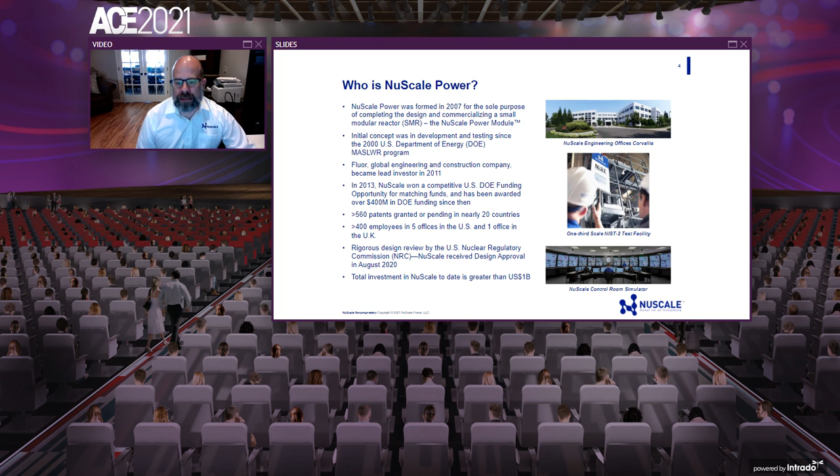Total investment to date is over $1 billion. You can see we already have a functioning control room simulator, and it's far different from any other nuke plant that I've worked at, in that it's much more advanced and intuitive than the old 60s design plants.

So why is it smarter? This is what I used to work on and operate, a typical pressurized water reactor. There are two kinds of reactors in the country: boiling water reactors and pressurized water reactors in commercial operation today, about 100 of them. This one, the pressurized water reactor type, is the one that's like San Onofre.

Inside these large dome containments that have thick concrete walls, you have a reactor pressure vessel, pressurizer, steam generators, and reactor coolant pumps, and none of these components are small—they are very large. But with our design, we remove the need for external pressurizers and steam generators because they're internal to the design. And since we use natural circulation, we remove the need for reactor coolant pumps.

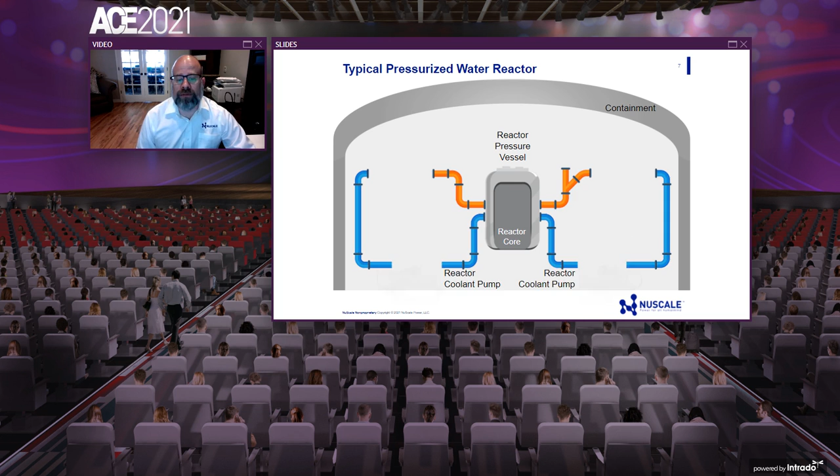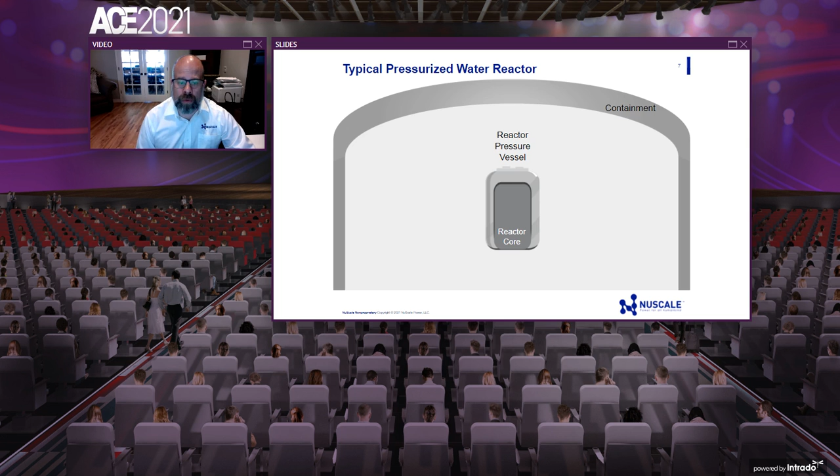What you end up with is a very compact containment and reactor pressure vessel that is about the size of a traditional core, reducing the size immensely. The containment vessel encloses the reactor pressure vessel—it's all one integral unit, including the steam generator and pressurizer and containment in an integral package.

It produces about 77 megawatts of electricity per module, but they're small enough to be built in a factory and transported. You can dedicate each one to whatever independent operation you want—whether one of 12 modules produces heating steam, one produces hydrogen, or all produce electricity. You can get up to 12 modules with 924 megawatts of electricity, and down to 4 and 6 module plants, depending on your needs.

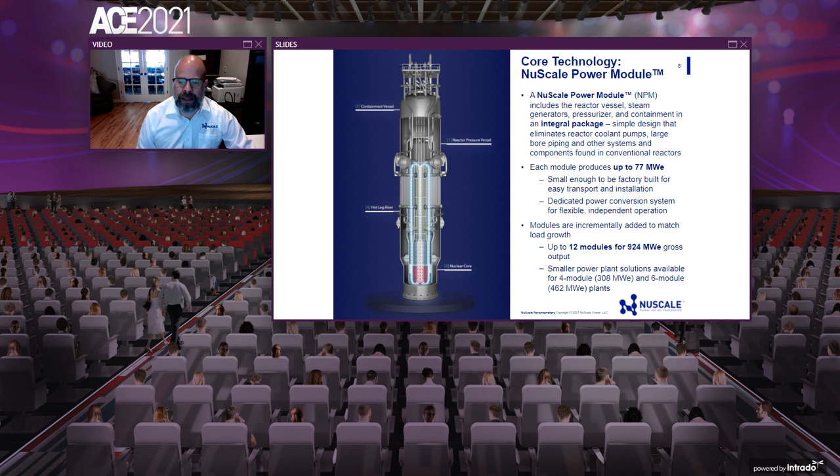So if you want 12 modules, you can scale up to that and be close to the traditional large scale nuclear power plants, but with a much smaller footprint due to our design, our safe design, and get close to that same megawatt electric output.

In comparison to the large scale pressurized water reactors, as shown in the pictorial before, the containment module is about the same size or a little bit larger than one steam generator, and there are many components inside that large dome. Our footprint is much smaller with that tighter package—essentially about 1/100th, you could fit 100 of those containments inside a large scale facility, but we produce 10% of the power.

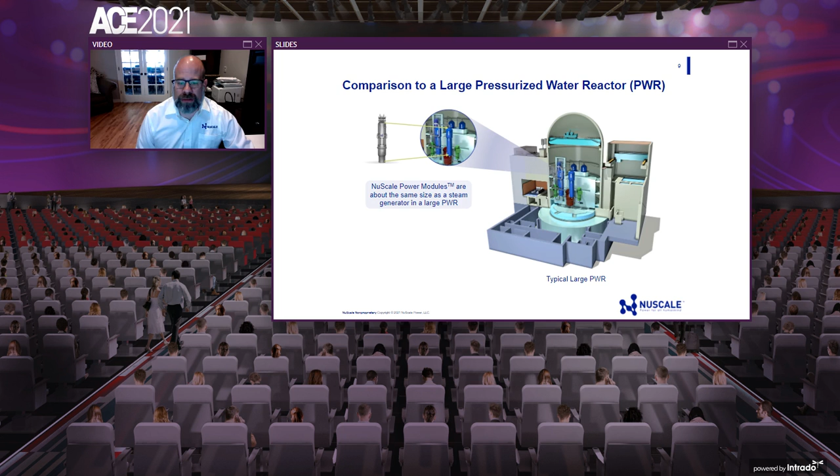So why is it safer? You can see the module there, and we've talked about the output of the SMR. They sit inside a bay of water inside the reactor building. This provides us with a triple crown of safety because the plant will shut down with no operator action or control system action, no AC/DC power, and no additional water.

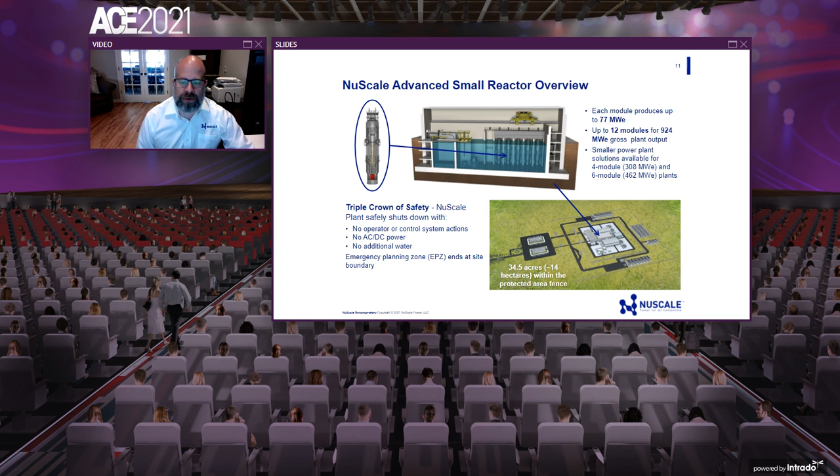This allowed us to end our emergency planning zone at the site boundary, as shown in this old diagram—about 34 acres within the protected area fence. A traditional plant's emergency planning zone goes out beyond 10 miles in every direction. I used to work in the control room, so I was responsible for notifying those areas in case of any event, to inform the surrounding public. We do not have to do that because of the high reliability of our design.

So why is it so safe? Because we don't rely on pumps or electricity, we rely on gravity. This is a pictorial of one small modular reactor inside the pool. You can have up to 12, but the pool is sized to allow for adequate decay heat removal over an indefinite amount of time during a shutdown.

So an emergency shutdown: rods go in, the decay heat removal system turns on and starts transferring that decay heat. Now, decay heat, if you're not familiar with the term, is similar to an electric stove. If you remember those old school burners, you couldn't put your hand on it the minute you turned it off, you'd burn yourself. Well, a reactor produces decay heat that lowers over time.

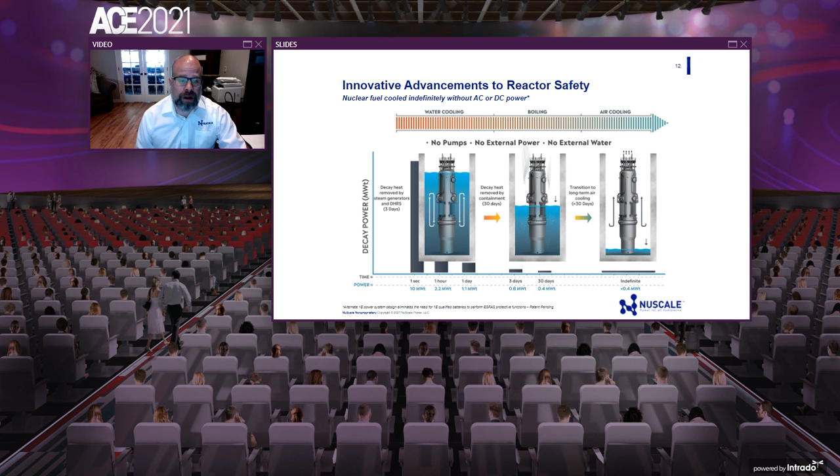At the bottom you can see at 1 second we're still producing 10 megawatts thermal, and in an hour it's 2.2. We're basically removing the heat from the residual heat. Over the course of 30 days you lower the heat so much that beyond 30 days you can be air cooled, so we need no extra water in the pool. We transfer all that residual heat to the pool, and the plant is walk-away safe. You don't have to have operator action, unlike any nuclear power plant designed today.

We've talked a bit about this, we'll go over it again. The way we remove the heat during power production, and use that heat to spin a turbine and make electricity, is through conduction. The water's heated as the nuclear reaction transfers heat through the tube walls of the steam generator. The water is heated by convection, and then due to the increasing temperature of the water, gravity, and buoyancy, the cooler water falls and the hotter water rises, creating natural circulation.

There's no need for pumps. So we naturally remove the heat from the fuel, transfer it, and make steam, and then we can use that steam for various things like electrical production, heating steam, or hydrogen production.

This allows for a defense in depth that has never been done before, because we need no electricity to transfer the heat away from the fuel. In an emergency situation, it allows for no requirement of electricity, so we have a second-to-none safety case, and the site boundary—the emergency planning zone—is now at the site boundary.

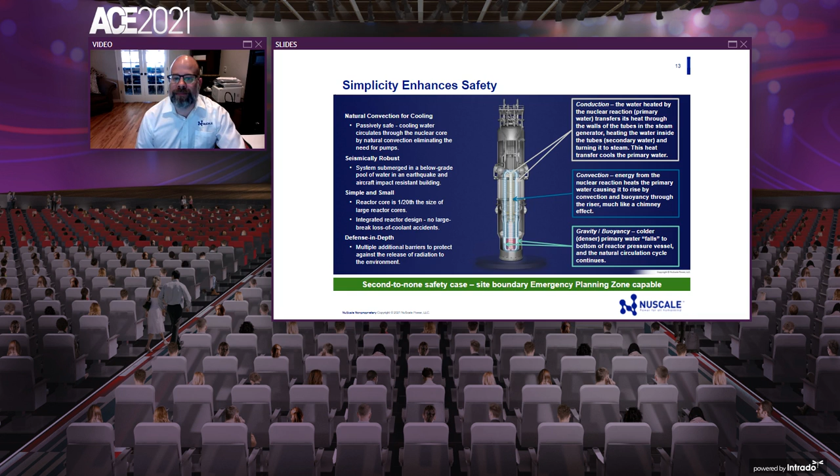So why are we cost competitive? This is where, really, the rubber hits the road for NuScale. Why we make sense is that we are going to fabricate the power module all the way out to containment in a factory—that's never been done before. We'll get into the problems with traditional nuclear construction and why they have cost overruns, because frankly you can't control costs when it's harder to control quality out in the field.

You can imagine welding outside in the elements—that's where all the fabrication is done for a traditional nuclear power plant. They do what they can to mitigate it, but it's not a factory where you control things like an assembly line and control quality. So we will build them in a factory. The module will then be shipped by truck, rail, or barge to the plant site and basically installed. There'll be very little fabrication on site for the safety-related portions of the plant, and it'll house them in a 12-module reactor building, or up to that, creating low carbon, secure electricity—that base load power that we're missing right now.

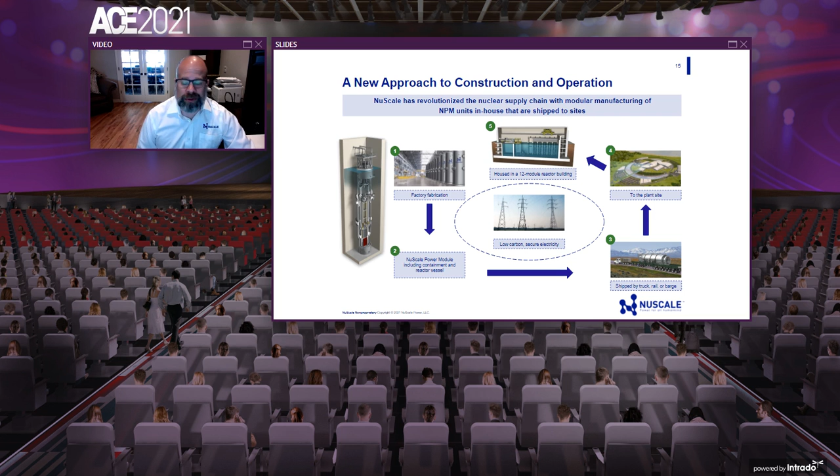The only things making base load power, if you're not familiar with the term, are coal, hydro, and nuclear. And the only one that's zero emissions is nuclear. So that's why I think we'll be successful.

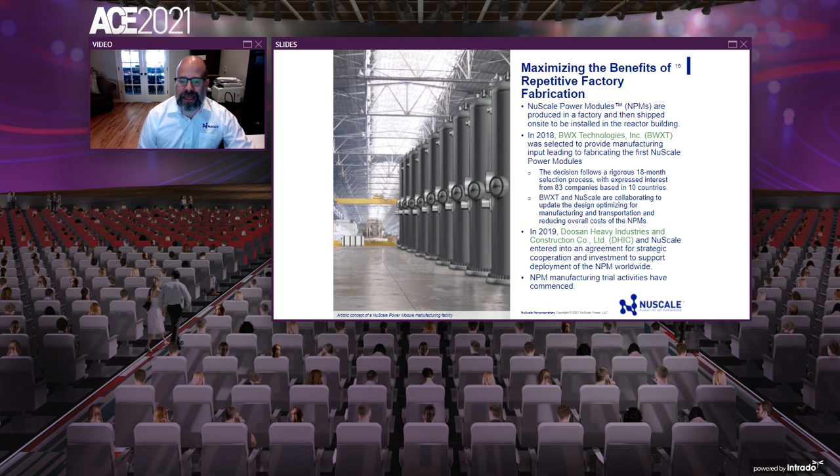So how do we maximize the benefits of repetitive factory fabrication? We engaged BWX Technologies—they were selected in 2018 to be our lead manufacturer in fabricating the power module. They're very experienced, having built reactor pressure vessels and submarines for a long time, and we're collaborating with them to optimize our design for manufacturing and transportation so we can further reduce the cost of the NPM. Then Doosan Heavy Industries was engaged in 2019 to support our worldwide effort.

So here's some information on historical nuclear construction, which will lead us into why we need PLM.

Traditional nuclear power plants are immensely complicated. You can see in the picture they can take up to a decade to construct. For those of us old enough to remember the 70s and 80s, we had Three Mile Island, and the focus was on nuclear safety and increasing efficiency, capacity factor, and safety. Largely, the nuclear industry has the highest capacity factor, meaning the largest percentage of time at full power of any source of electricity. We achieved that through lots of design changes and equipment upgrades.

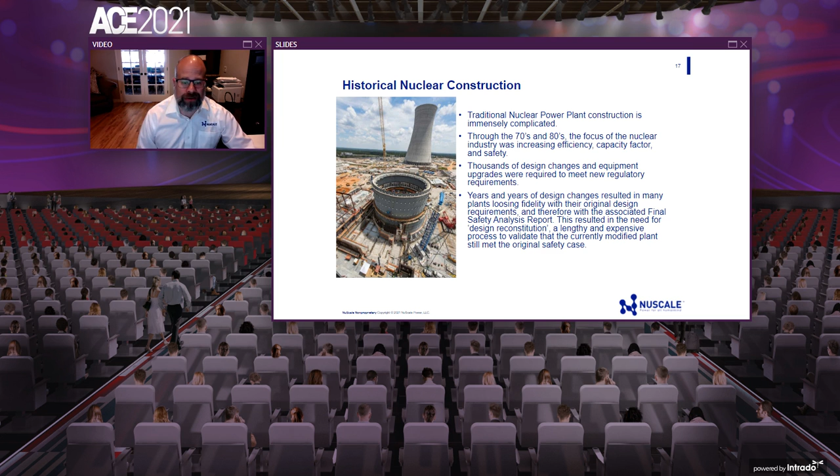We changed our process, our training, all driven from regulatory requirements. But after years of design changes, many plants lost the fidelity of their original design requirements. We incrementally changed these plants, but the initial final safety analysis report listed requirements you must meet at all times in operations, or compensate. Plants lost that fidelity and couldn't prove to the regulator over many design changes that they met all those requirements. This resulted in some plants having to do a design reconstitution, a lengthy and expensive engineering process to validate that the modified plant met its original safety case. This is what we're using PLM for - controlling requirements.

Our SMR design is vastly simpler and safer, but there's still 60,000 requirements that need to be maintained, and we need to prove that. Legacy plants have struggled because all that information has been document based. We used to joke in the 80s that when the constructor turned the plant over to the operator, they'd back up a truckload of paper - boxes and boxes of paper with all the information about your plant. But it's hard to maintain all those design requirements when they're in volumes and volumes of paper.

Fast forward to the 2010 timeframe, we started constructing two large-scale facilities on the East Coast. They're still managing things in a paper-based way, but digitally - so now we have PDFs versus paper, but they're all in disparate systems. We needed a new way of doing things, so we looked at how the aviation industry does it. These legacy plants have found a way to maintain their design basis, but it's not efficient.

One time I sat in as a senior reactor operator and control room supervisor. I was the last line of defense in turning mods back over from engineering and maintenance to the operations department, putting them in service. I'd have to dig through mountains of paperwork to validate that those system upgrades still met the design basis requirements. I remember an engineer who had to outsource a safety-related heat exchanger, and the time he spent trying to confirm he'd gathered all the right requirements was immense. I felt bad for him. Validating it was tricky too - I had to be sure he did his job correctly, versus having a system where I could just trace all the requirements back to the component, back to their base requirements. That's our goal.

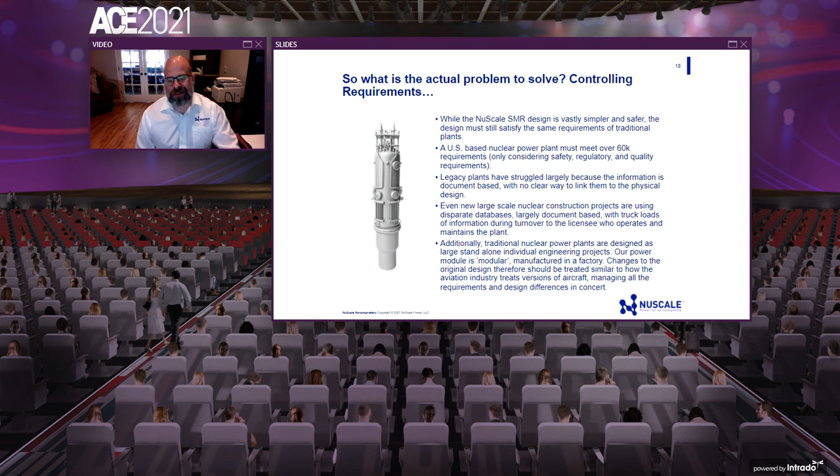Nuclear power plants have always struggled because they've been individually engineered, large projects, but ours is going to be modular, more akin to the aviation industry, managing requirements and design differences in concert in one system. So managing requirements from design to decommissioning is the goal.

Design requirements come in many forms: regulatory statements, code requirements from ASME, bounding parameters, customer requirements, or site-specific requirements. If you design a plant that's bounding, but the area it's in is different, there need to be changes to the plant. A good example is a plant operating in Denver at altitude versus one outside New Orleans at sea level - there are different atmospheric requirements, and we need to change the design accordingly, but track those in one holistic system.

Future design changes can come from the federal government, the customer, an industry initiative, or plain necessity. We need a platform that allows us to apply system engineering principles and drive those requirements down to any part in the BOM with clear traceability back to the base requirements, and maintain configuration management of that design whether the change occurs next year, 2029, or 2089. There's a lot of power plants operating now that were originally designed for 40 years, sometimes 20, and now they're operating 60 to 80 years, having gone through upgrade projects.

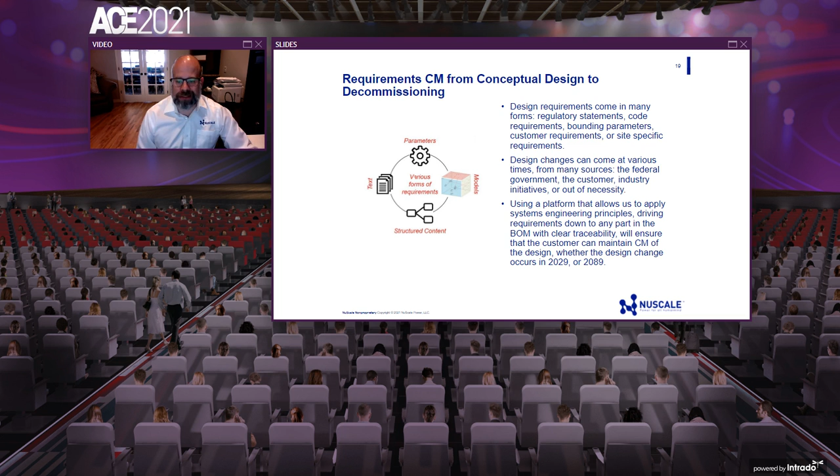We plan on our design lasting a very long time, and so we have to maintain configuration management of that. There's a paradigm shift where we're going to be the first nuke power plant to be designed and managed with requirements by PLM as the backbone for our single source of data. This will allow configuration management of multiple iterations of the same design, but ensuring we always meet original design requirements.

The licensee, what we call in the nuclear industry an owner and operator of the plant, will receive a digital twin with all the relevant design information instead of a truckload of digital paper, or disparate databases of information. The application of the digital twin will make design requirement traceability and changeability possible down to the part. Aras PLM is going to allow the owner to consistently manage those configuration changes, or whoever the owner puts in charge, because some owners don't manage them. They have a design firm that does, across the entire life cycle of the plant, maintaining that license basis and final safety analysis fidelity long term.

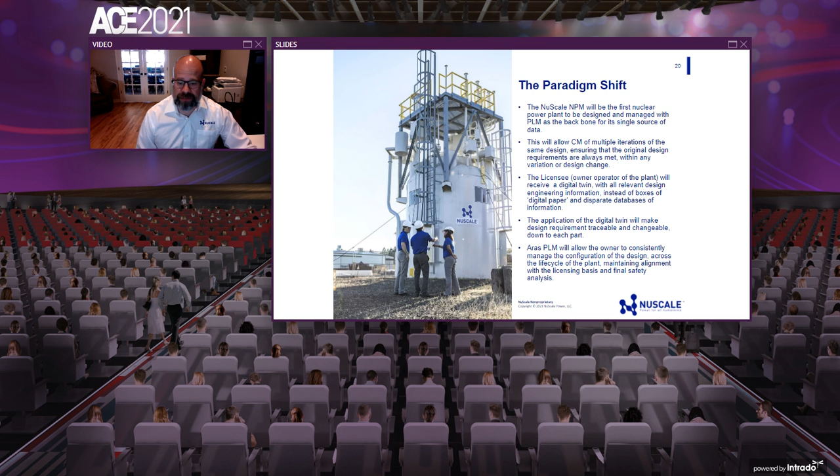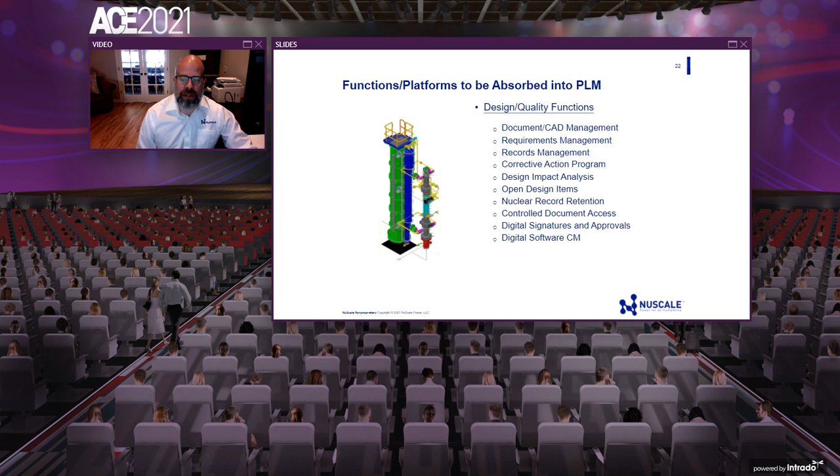Corrective action program is pretty much the only one that wasn't in phase 1. The rest were all in phase 1, and it was a long project, two years. You can imagine I had a different workflow or database system for every one of these.

It was a lot of lost efficiency pushing data between systems because a lot of it was manual. So this gets to the heart of the question: why did we choose Aras Innovator? We already had a PLM system, but it was not user-friendly. When I talked to folks who had moved from a legacy system to Aras, the flexibility and scalability caught my eye, and I decided we should give them a chance.

Their unique architecture adapts to changing processes versus software that forces you to adapt your process to the software, and I didn't want to do that. With Aras, we realized the digital thread could come sooner at lower cost and could transform NuScale. As our processes change, the system is easier to change to meet our process needs, and that's going to happen. Regulatory requirements change.

We have to do certain other things, so we need that flexibility. Scalability was another one. The cost of our legacy systems was higher than the fully functional PLM system Aras has, let alone we still needed other modules for our legacy system that was going to balloon costs per user, and we couldn't justify it. With Aras, it supports those increasing demands with their subscription structure. We wouldn't have been able to do that under a traditional software licensing structure.